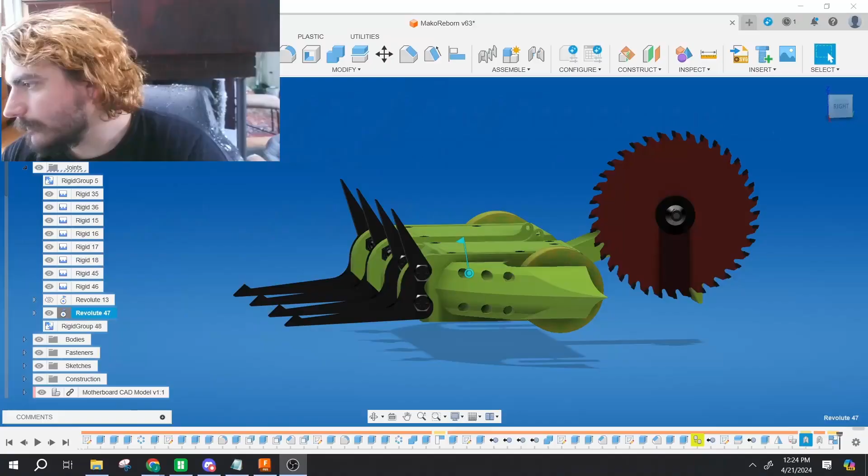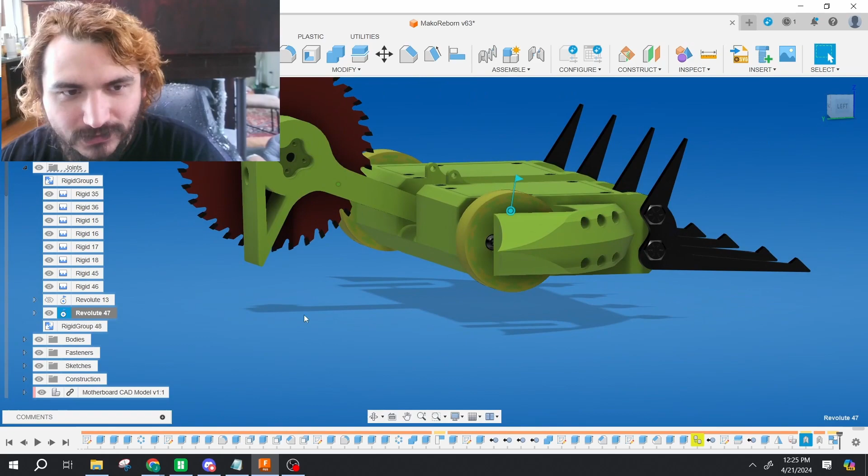Alright, here's the new boy. The first thing you'll notice is that the saw arm rests all the way in the back and swings a full 180. Besides the obvious, where having the saw arm back here as opposed to up here, it's a lot safer. Robot's less top heavy, but also pressing this little thingy into the ground allows the robot to be a lot more stable.

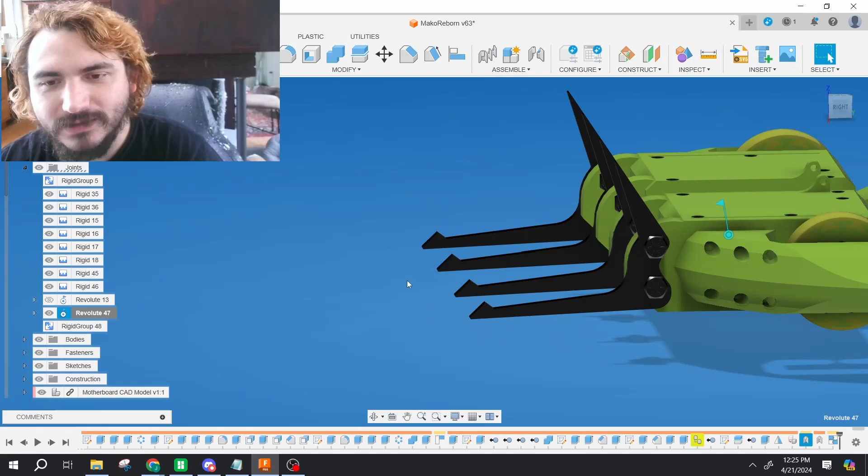I've really enjoyed that aspect of the robot, especially facing horizontal spinners. You know, they're gonna smack this blade up here more times than not. Next feature is I've got 4 forks up here. I've got these little catchers up here, which I've enjoyed using a lot.

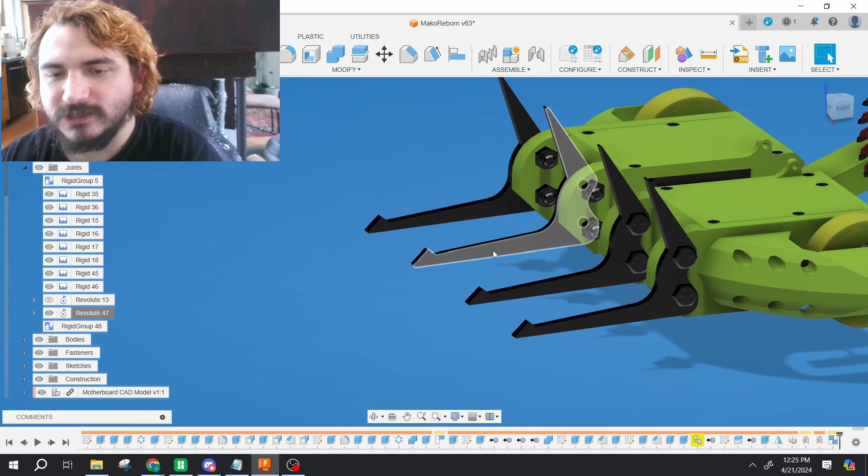And also, these are designed so that the inside forks, I could pop out one of these bolts and they can become hinged. So it allows me to quickly change between, realistically, any of these can be hinged, any of them can be fixed, depending on the matchup. I still don't know when exactly I prefer using fixed versus hinged, but this allows me the flexibility to do that.

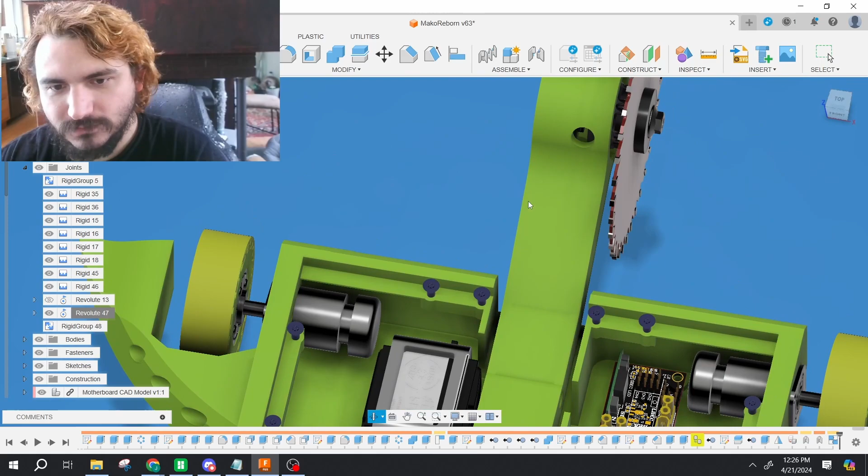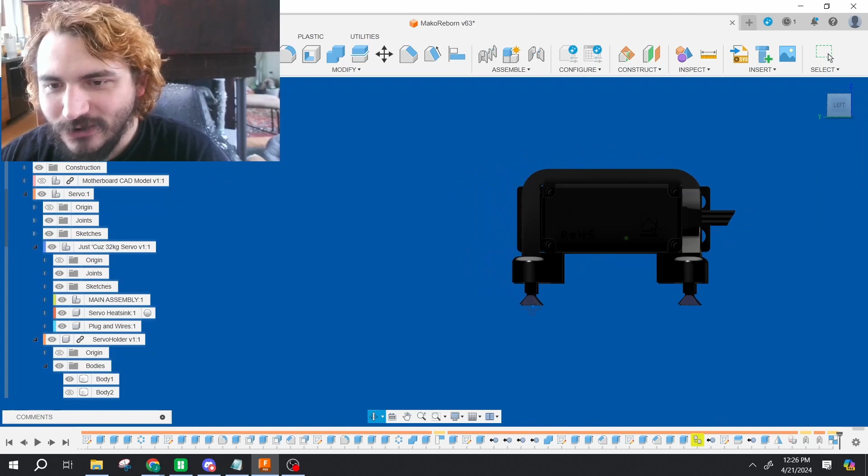Opening this sucker up, see, I've got a big 32 kg servo in here. This is the Just 'Cuz 32 kg model, just slightly modified for the changed geometry. But let's see, we've got a TPU mount, we'll call it, that holds the servo in, raises it up a little bit, and screws in through the bottom.

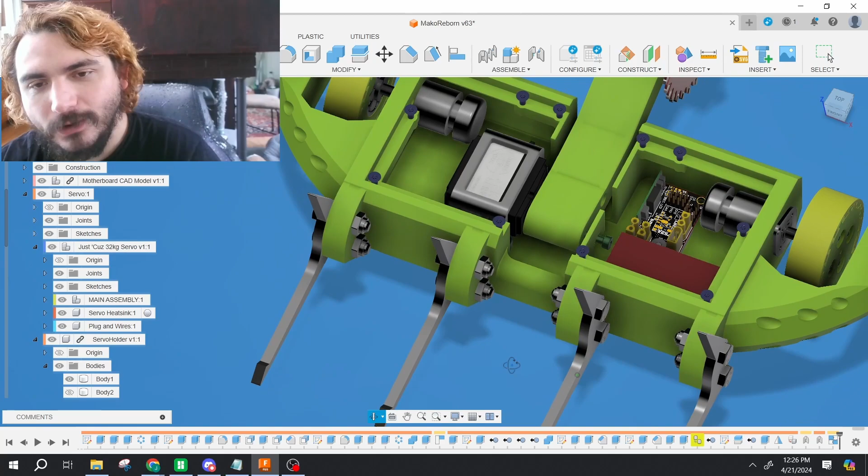This allows me to quickly pop this out if I have to between matches, tighten everything back up, and screw it back in. I used L mounts, L brackets, made of aluminum in January, and the big hits would bend them, and also the screws were just slowly vibrating out into the servo and into the bottom of the robot, which, you know, I could just Loctite them, but then that makes it more of a pain in the butt to pop it out between matches. So this has worked well.

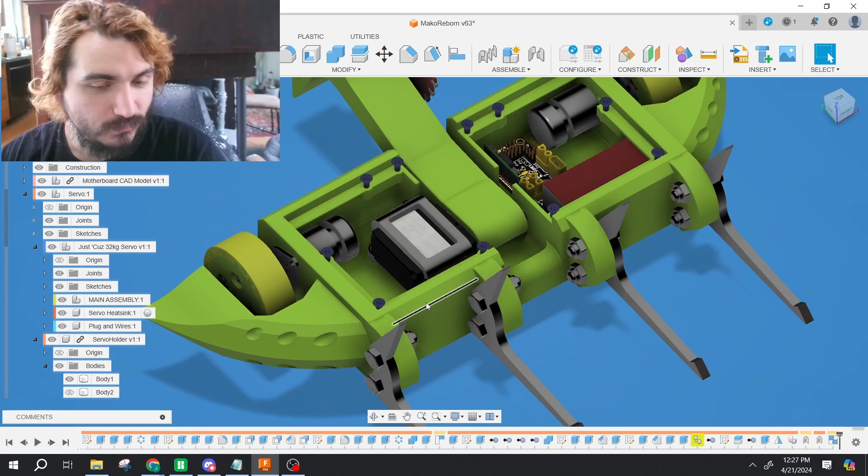Another thing is, because I've got this whole split chassis thing going on, I can feed the servo wires under there, feed the wires from this motor under there, and they are relatively out of the way.

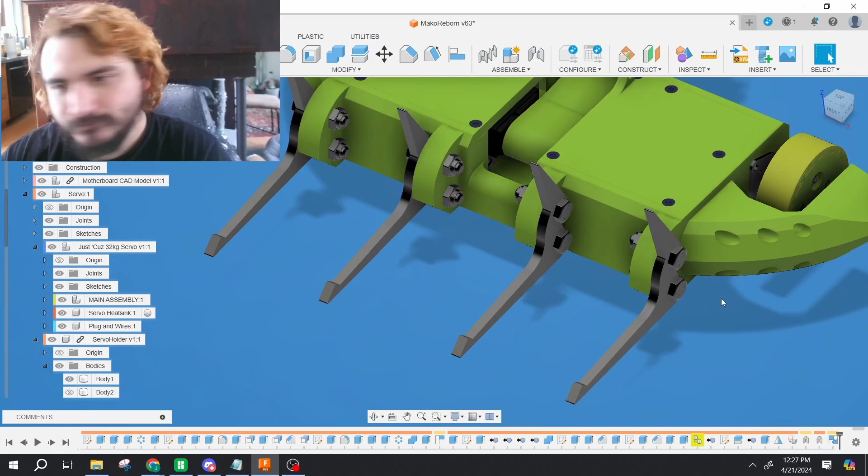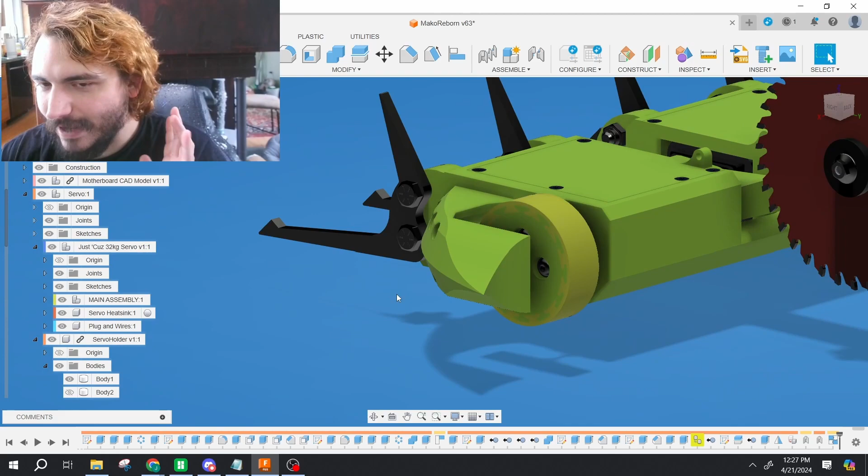Next thing is these wheel guards. I guess conventional wisdom is that these are bad wheel guards because they don't go all the way down and they're going to get caught by vertical spinners. My idea here, and it might be stupid, is that if there is a robot on my side and it's a vertical spinner, I would want them to actually hit this early and bounce me away, and hopefully that gives me a second or two to reset.

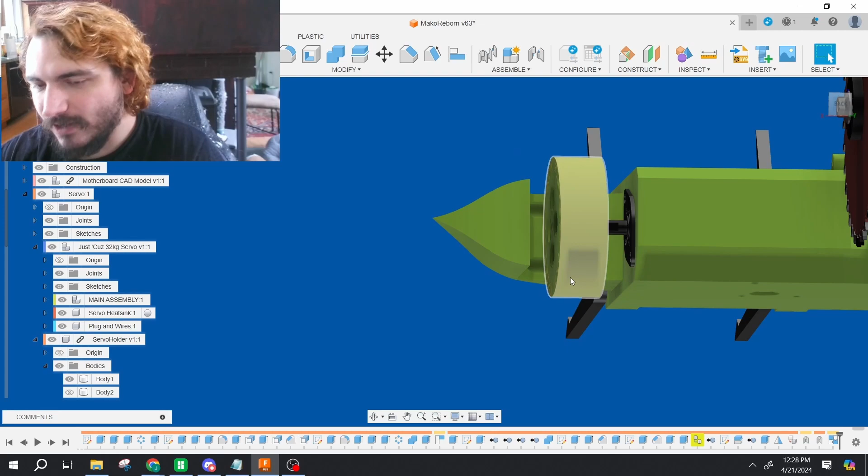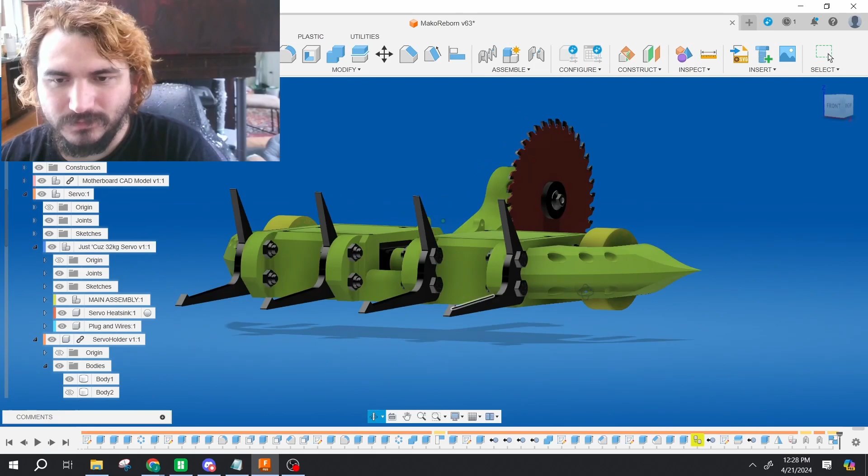Versus if it was a more standard wheel guard, they might get under me, hit my wheel, get to the juicier bits, and keep hitting me. The idea with this is it gets caught early, flexes, bounces, and gives me an opportunity to reset. I don't know how good that has been working, but also it just looks cool. Sometimes you have to go for the aesthetic over the capability or whatever.

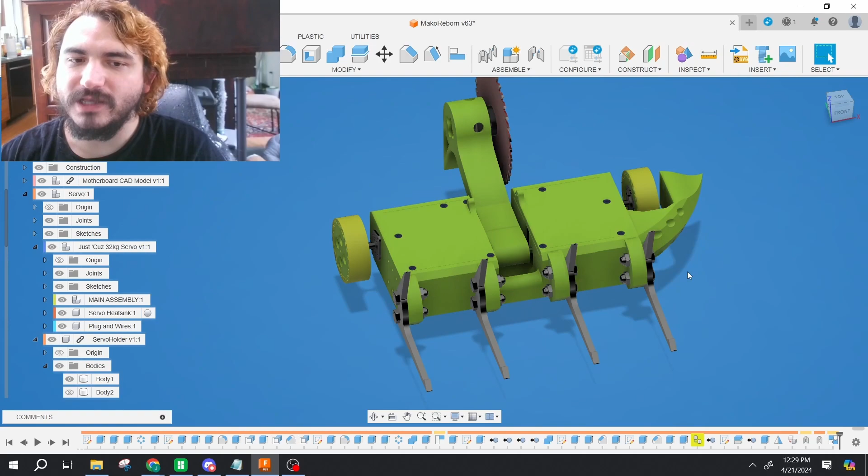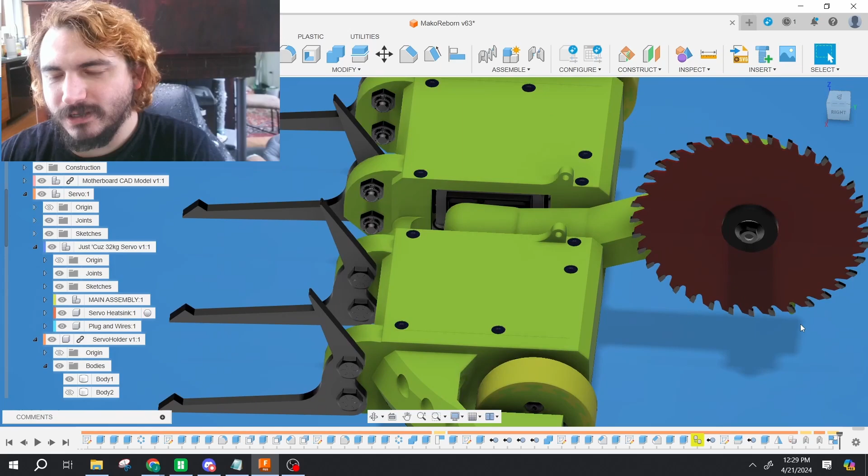Another interesting thing is these are symmetrical, so I can come with 3, 4, 5, whatever, and they can fit on either side. I can also remove these against control bots, which I do in this tournament. Because realistically, I don't need to protect the wheels, and this would prevent me from getting lifted by these, getting caught on the side of the wall, whatever. Yeah, not much else interesting going on. The saw arm now has a little channel to keep the wires safe.

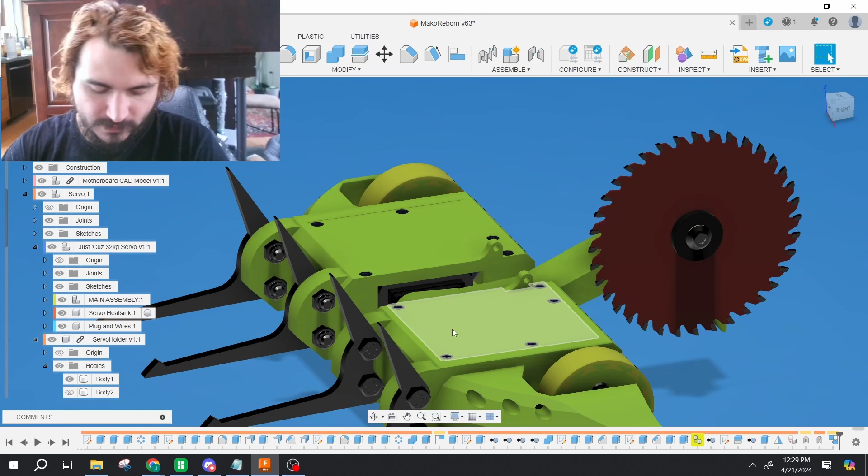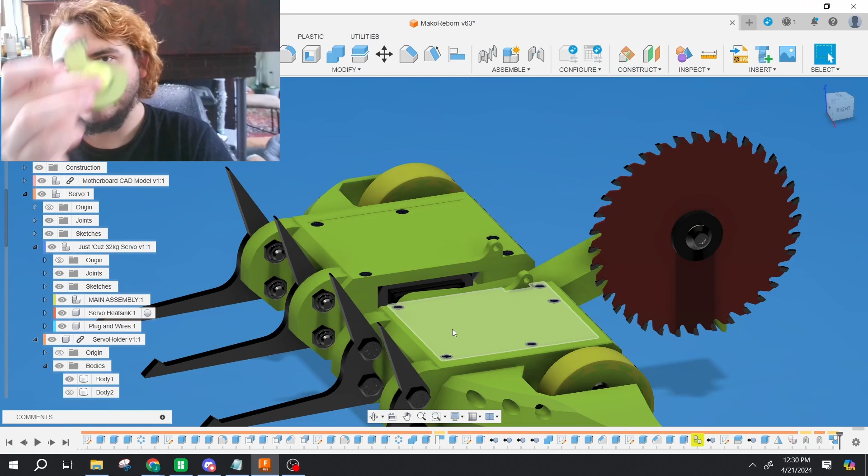Oh, and one thing that I quickly designed between March NHRL and this tournament was a little custom AR500 blade. The idea with this is, instead of cutting, maybe I can get some big hits. I've also got a faster motor, which can keep this spinning at 300 miles per hour, despite being 3 inches compared to the typical saw I use, which is 4.5 inches.

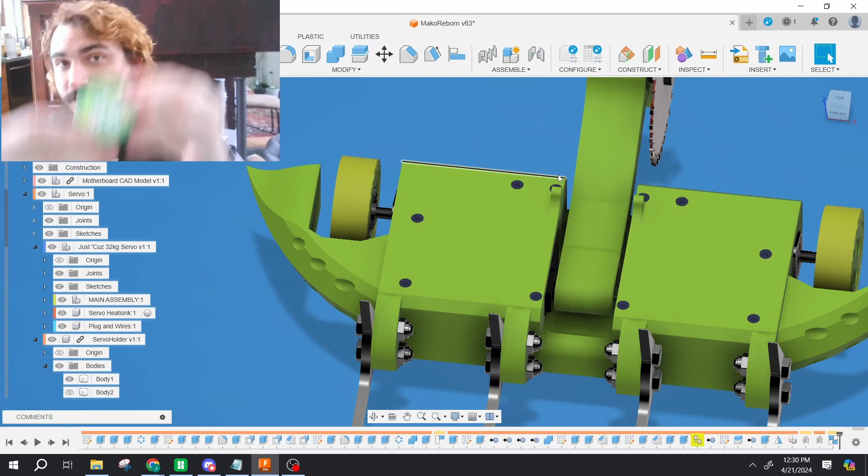Not much else has changed since NHRL to this tournament, but these are the old wheels, and you can see the mount pops out the side, which is less than ideal. New wheels. This goes inside, sits in there, and I guess the idea there is it's protected, and if the wheel gets hit, there's less of a fulcrum going into the motors.

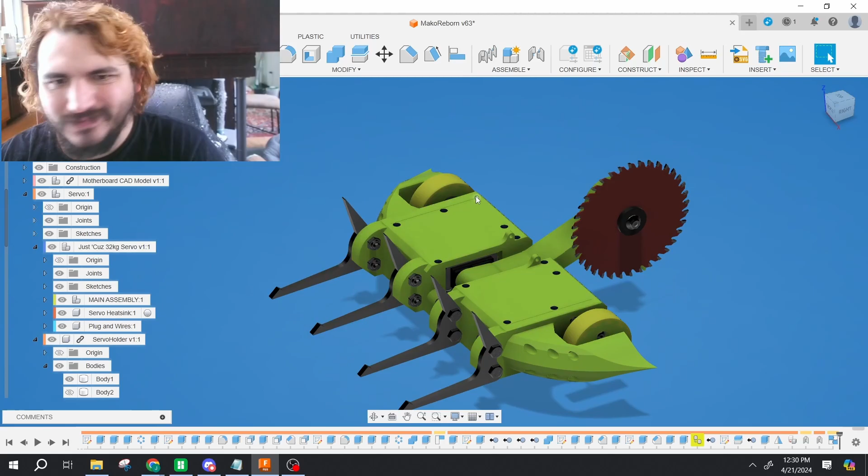I've been rambling. This tournament had 15 robots, double elimination. Did not know who my opponent would be until we got there, really. First opponent is Honeycomb, an SSP kit. I believe the driver's name is Mark. I wouldn't say I was excited for this matchup, but I was kind of glad to get a control bot first. It's SSP, which I'm super familiar with. So at least I knew my robot would not get completely obliterated in the first match. Mark was a very nice guy. I actually helped him with a few things to get his robot in.

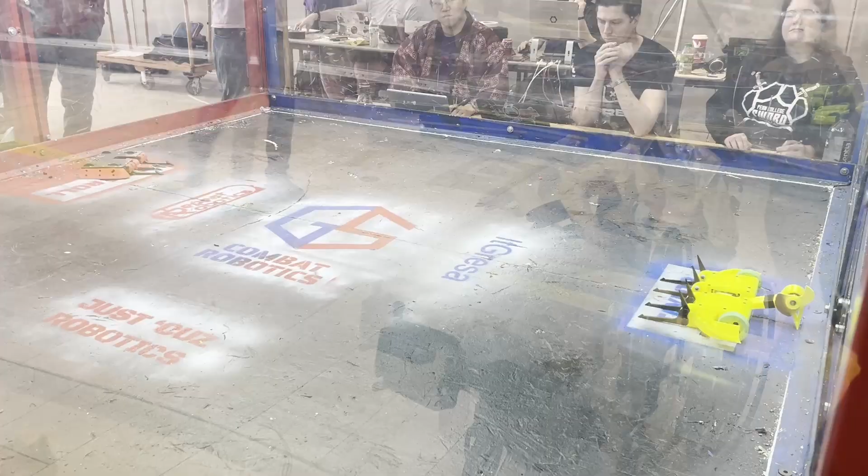Here's the match. 2, 1, fight! So here comes Mako. Here comes that spinner. They bring it down. Now, it looks like those forks are doing their job. Mako can't quite reach the body. Got to get to his side. Let's see if they can get to the sides or the back.

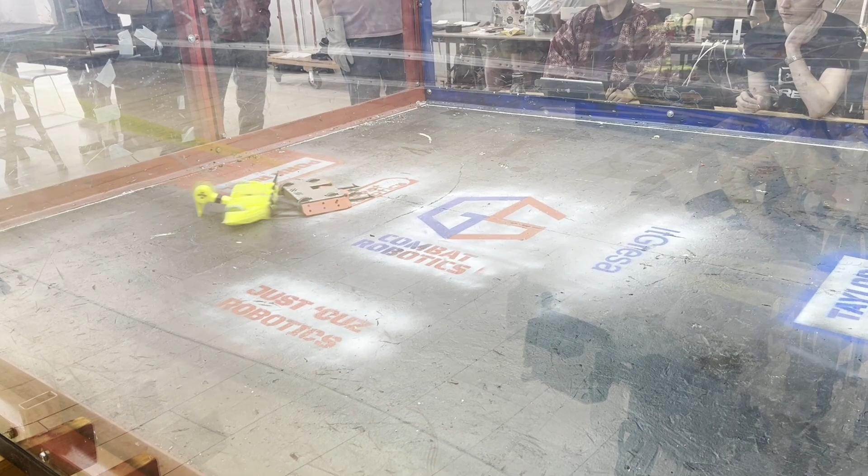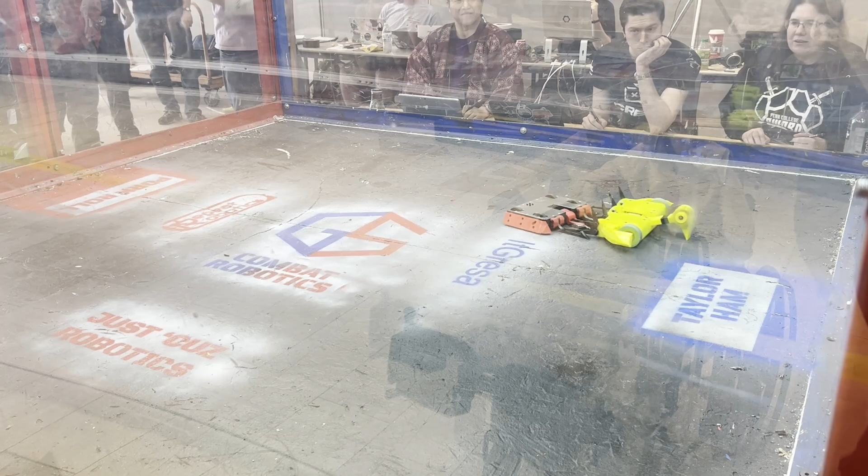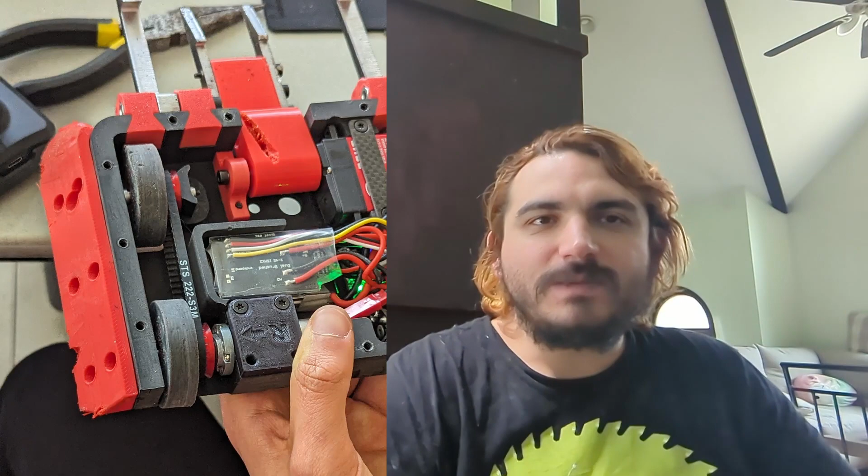So that was a bit of a mixed bag. Got a fairly quick tap out, but unfortunately one of their drive sides was just not working right out the gate. One of those things where it works when you test it, and then you put the robot down, and something's funky. Thankfully, they did not tap out right away. I still got to at least test my robot. However, this weapon did not do too great. Cut right through some TPU, but swinging into their titanium made some cool sparks, but did not elicit a big hit. I was definitely not getting through the titanium. But regardless, still happy to come away with the win.

This next matchup here is up against Ryan with Apex Predator. It's a gorgeous 4-wheel drive beater bar robot. I notice he's got a G10 or carbon fiber top plate. Not sure exactly what it is, but I know it should be weaker than titanium. So I figure let's give this weapon one more shot.

Let's get this fight started in 3, 2, 1, fight! Good box rush from Mako. Yes! That's that hammer saw down on the back of Apex Predator. You see that hammer getting stuck in the wheel gap of Apex Predator. A couple of good big hits, but now Apex Predator is starting to return fire, getting good traction against those forks of Mako. Apex Predator now starting to juggle Mako around.

Another good hit. Mako's forks should be underneath there, but Apex Predator's bar is so low it's able to reach those forks. Mako looking for another big hammer saw strike, but I think their right wheel is locked up. So Apex Predator able to get beneath Mako now. Mako wants to drop that hammer saw again. A good hit from Apex Predator there. Apex Predator looking for another good hit. Mako looking for another strike. Swinging that arm, but nothing doing just yet. 90 seconds left in this fight.

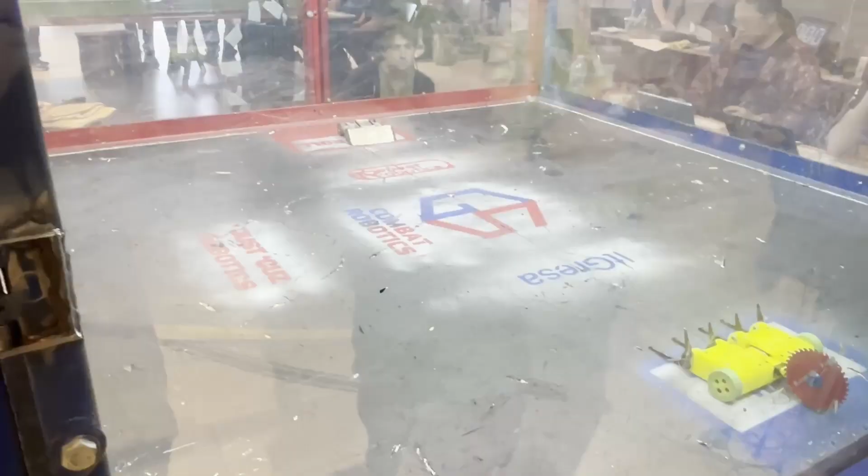I've got to be judicious with my saw, because if I break it without doing any damage, then it's going to be pretty hard for me to win. But either way, let's watch it. 2, 1, fight! Here we go. Nice. Both bots looking for an angle. Mako had Underbite teed up very briefly, but sorry, that's Underglow, not Underbite. Nice push. Totally different bot.

Underglow was able to get out of that pin, but oh, here comes that nasty saw. Sparks everywhere. You hear that saw. Don't drop it on the wedge next time. And Underglow launches himself against the saw. Mako's got to be really careful. Those saws bend very easily. Once they do, they're nowhere near as effective. Don't jinx me here. I'm not jinxing you, Julian.

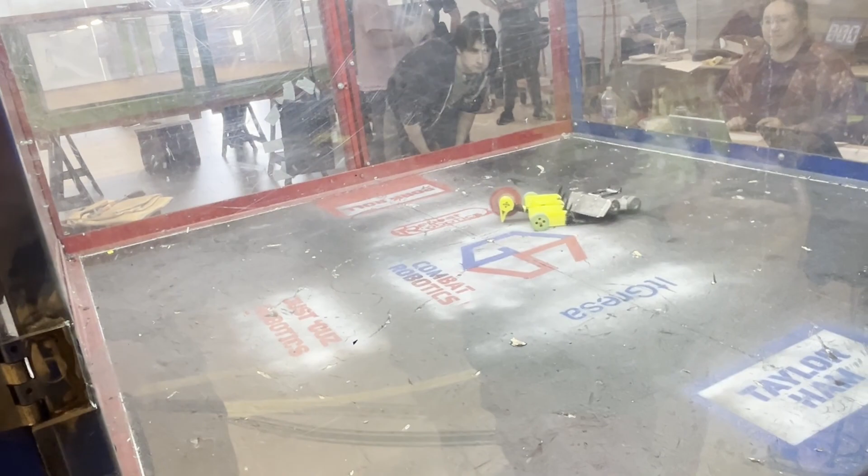All right, Mako getting Underglow into the corner. Nice! Do it again. And another hit. And I can see already there's a big slice taken out. More! Some more big hits. These hammer saws are terrible. Wheel. You see that saw getting a little bit wonky, but it should have a couple more hits in it.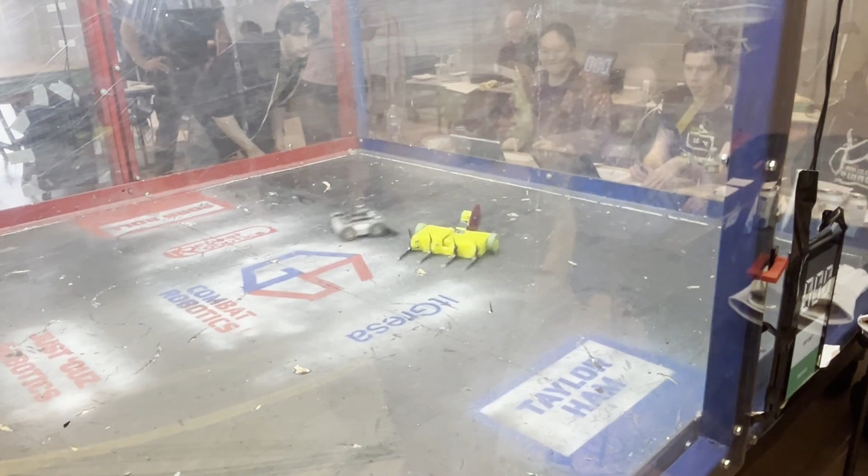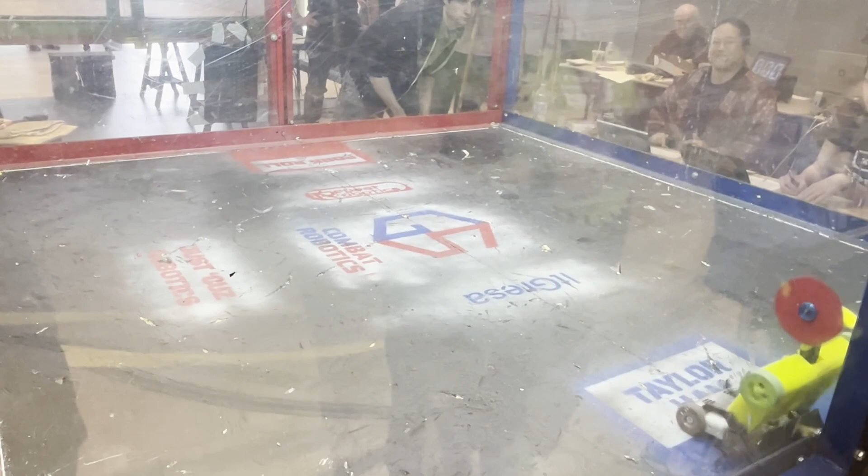Here comes Underglow. If Underglow can survive a little bit more, maybe it can turn the fight. 80 seconds. Don't go crazy. Underglow with that big torquey lifter. Mako looking for another hit. It's already got a few slices in. Some big slices in. That's a pin and up from above.

And you see a little cloud of TPU raining. You're up. 3, 2, 1. And that's the pin being released. 50 seconds. That saw still spinning. Nice! And a big hit on the top.

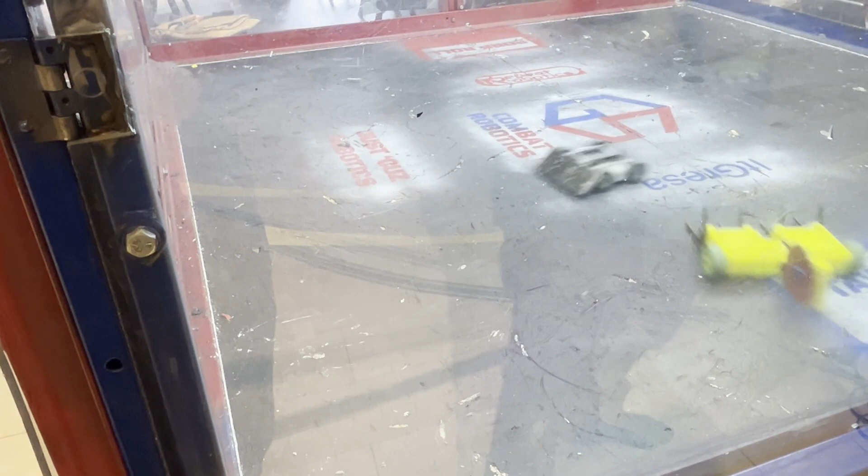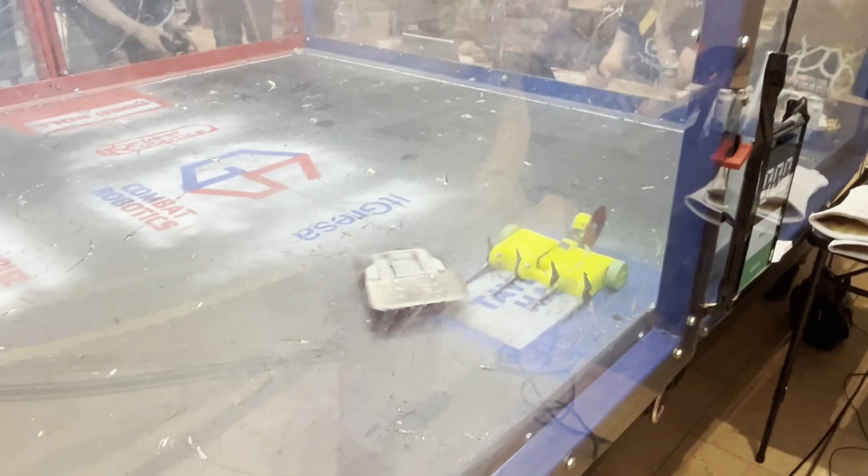Unable to get a second hit in, but a lot of these really big sparky hits happening. Now, oh, that might be a pin for Underglow. It is. Back and forth fight here. Underglow with a top and bottom, and here comes Mako. Stop it, stop it, stop it. Don't kill your weapon, don't kill your weapon. And now it's sawing the arena.

10, 9, 8. And about 10 seconds remaining in this fight. Mako going for another hit, and it does. And gets into that wedge. 5 seconds left in this fight. 3, 2, 1. And that's Mako going for a hit. That's the match. Woo!

That was a tremendous fight. Very difficult match. Me and Rob were sitting there waiting for the judges, both fingers crossed. I kind of thought I barely won. I'm sure he thought he barely won. It was so close, but by the grace of the judges, I won, I assume, by a point. May have even been split. I do not remember. But yeah, great fight.

Real close on control, real close on aggression, but maybe I get a little damage points, even though I didn't cause any significant damage. I did cause some damage. But yeah, that was a great fight. Seeing the sparks fly was a lot of fun. If anything, next time I may have been more aggressive, maybe spinning the saw up earlier, using it more often. But if the saw broke at any time, if at the checks at the end my saw was down, he would have definitely won. But we came away with the W, so I'm happy.

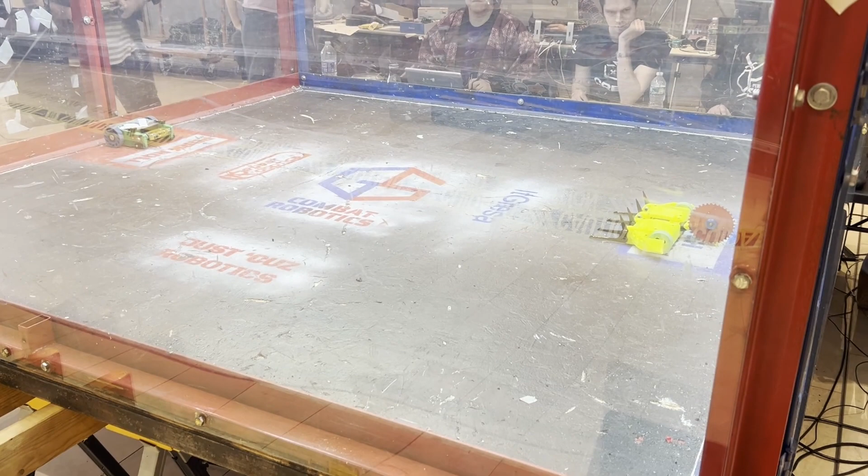3, 2, 1, fight! Yes Chef weapon turns around, tries to get around Mako. Mako with a good hit. 5, 4, 3, 2. Good. Mako trying to get that saw. Nice. Trying to get that saw into that spinning bar. Mako's going to want to get around to the back. Keep doing that, man. Yes Chef has a very chaotic way of fighting.

That's what they're going to try to do as best they can, is just be everywhere in the cage at once. Careful, careful. There's that saw. You hear it spinning up. Are you going to drop it? We'll see. 3, 2, 1. Release. Now they got to release that pin. He's attempting. There they go. They've released the pin. Looking for an angle. Nice. Get him.

What it's doing is it's striking the force of Mako and flying away from the impact of that hit. There's a good drive. Oh, and there's a good hit. Do it again. That's exactly the kind of hit that Mako wants. Attacking the side. They want to hit the side of that bot. That's exactly what they're doing. They don't want any part of that bar as far as that claw's concerned. So that lock is perfect for them. 80 seconds. We're halfway over. You're doing good. Just keep it up.

Here comes Yes Chef back again. Trying to find some angle on it. Oh, get it. Oh, that was almost it. Mako just couldn't get Yes Chef to really give him a good hit. Stay square, you're doing great. Mako, when they pin Yes Chef, Mako wants Yes Chef pinned by the side. So yeah, they bring the hammer down now.

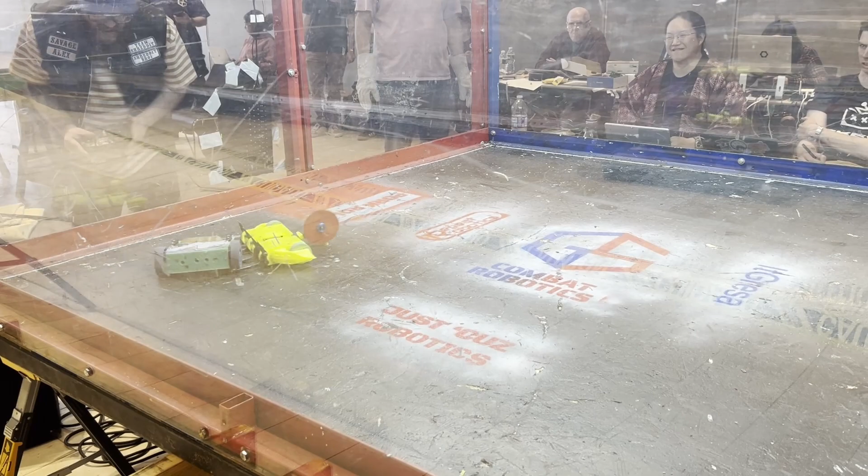I see a little chunk of armor missing from the top of Yes Chef. Actually, I think that's the bottom of Yes Chef that Mako got. So Mako able to make a little slice in there. Hear that saw spinning up. Are they going to drop that saw again? Yes, they are. Dropping the saw to that spinning bar. That's the kind of hit that Mako wants. That's exactly what they want coming through. Drop it slow. Yes! That saw was like a half inch into Yes Chef's body.

Let him live. Another hit. Is that it? That's all? Oh, wait. Oh, no. Wait, are you done? I'm not done. You can do whatever you want, but it's not working. Is that a tap out? 6, 5. Unclear whether Yes Chef is tapping out or not, but it looks like that bot is done. That is a knockout.

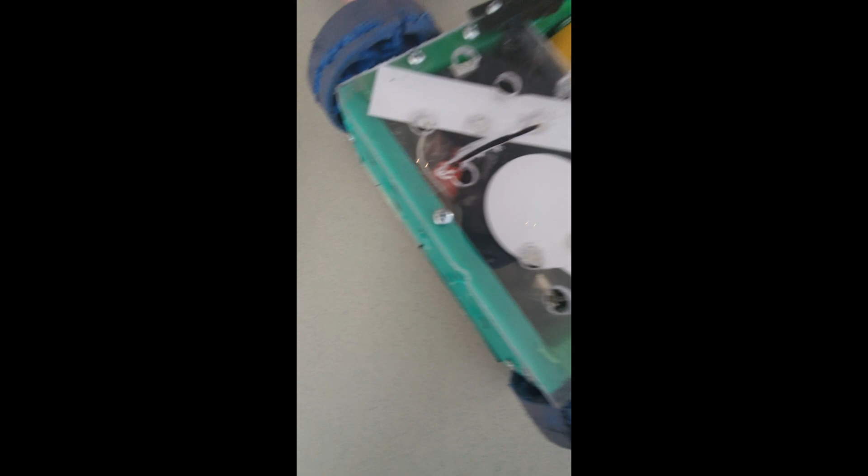Mako knocks out Yes Chef. At the top, wheels. That's impressive too. The two. Heck yeah, man. And then you got one good one on the bottom. Yeah, that was like the first one, I think. Really?

I think that's literally my favorite match now. I know I probably just said that about Underglow. If not, I thought it. But tremendous match, and then one that might just be a little bit better. The little horn forks did exactly what they were supposed to do. Kept him corralled. He even popped up into them once or twice.

Throughout the match, I kind of became more confident with bringing the saw down early on, just kind of biding my time, waiting for the perfect shot. I landed a jab here or there, but eventually I got him kind of stuck, pinned in the corner, and slowly brought the saw down for what was almost a kill shot. Might have been a kill shot.

It seemed like his robot shut off and then sprung back to life for like a split second, and then died again. Not really clear, but I think they called it a knockout in the commentary, but it went to the judges. He survived the bell right at the end, but I won that. And Alex actually sent me this pic a few days ago of one of his motors exploding, I guess, from the shock of dealing with my forks.

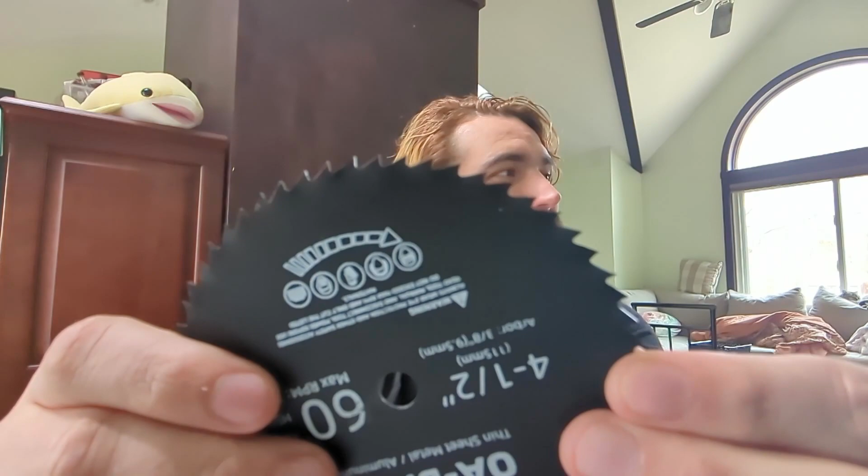It'll be hard to pick it up on the camera, but what's interesting about this is each one of these teeth is offset from the other. They alternate, going from side to side. I can't get it. Let's see. You can kind of see there.

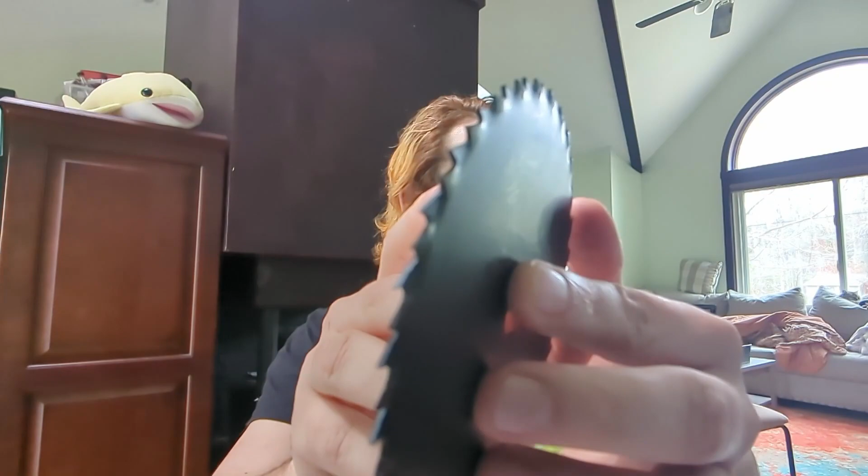Talking to a woodworking friend, or rather a friend who does woodworking, Ben, who runs Bean Supreme and codename Pinto at NHRL, he also thought it would be interesting to try this. I might be able to get some ripping action. But overall, I'm just nervous, but very excited for, like I said earlier, a chance for revenge.

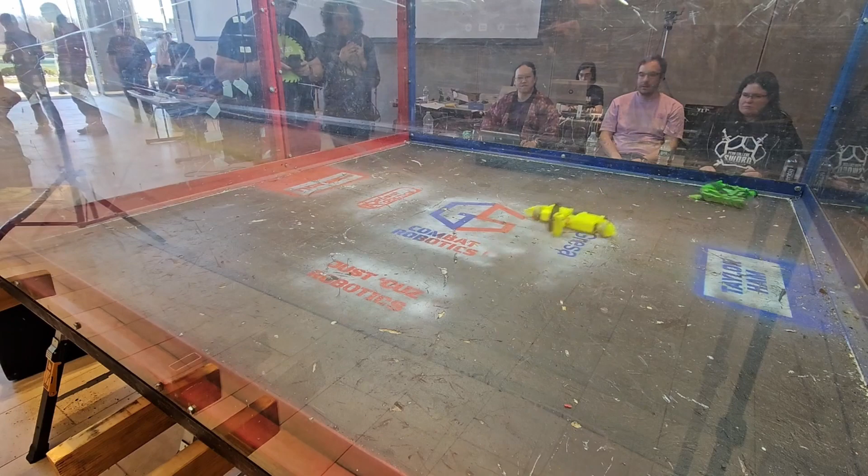So, here we go. 2, 1, fight! Neither bot going for the box rush. They're approaching cautiously. Good hit from Apex Predator onto those forks of Mako. Mako will take all that abuse from their forks. They want to pin Apex Predator and bring that saw down like that.

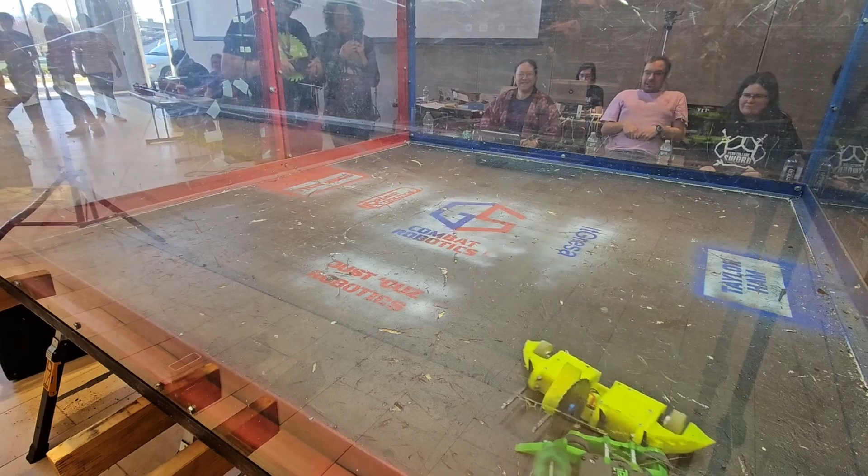So there's one saw, there's two saws, and Ryan is saying that they're entangled. We need to unhook, they're unentangled now. And Mako briefly upside down, big hit. Mako upside down again. He can self-right very quickly with that actuating arm. And the head, and a little bit of Mako just came off.

And I don't know if that saw is going to be able to continue to spin. Let's see if he can get that saw moving again. In the meantime, that is a lot of hits. And you get that saw spinning. And the arm is definitely working, and the saw spinning, and now it drops, and it is taking a couple of hits. I think they're stuck. Release the pin. They can't release the pin.

Let's pause. Are we stuck? Okay, we're going to unstick these two bots. So Apex Predator's top plate showing that it's up to the test so far. Yes, it's still going. So we don't want to open this case. Oh well, looks like they've done their job for us. Yeah. Okay, blue square, are you ready? Red square, are you ready?

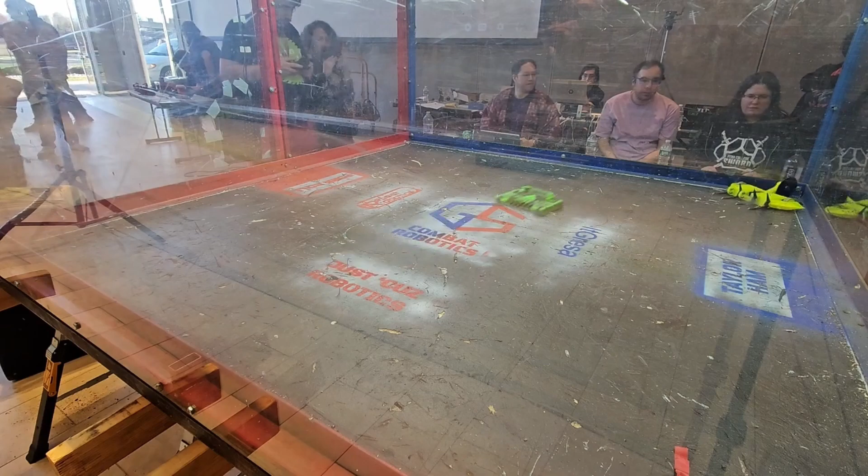This fight restarts in 3, 2, 1, fight! Apex Predator spinning around Mako, trying to get itself off the ledge. Oh! Huge hit, and that is the belt off of Apex Predator and half of the saw. I'm sorry, a quarter of the saw is off of Mako. Off the ledge. Oh! Yes!

That was a massive hit, and both bots took a lot of damage off that hit. He's still trying to spin that saw. It's not going to be very effective with only 3/4 of a saw to work with. So both of these bots a little bit compromised, but Apex Predator trying to push against Mako. 30 seconds left in this fight.

Are they stuck again? They're stuck again. And we're pausing again. This time we don't have to wait quite so long for the saw to finish. And we're going to... There we go.

Oh, come on, Alex. There we go, Alex. Don't make me get Alex to take the crowbar.

All right, red square. I'm sorry, blue square. Are you ready? Blue square is ready. Red square, are you ready? This fight will resume once again in 3, 2, 1, fight. All right, so no weapon for Apex Predator, and 3/4 of a saw for Mako.

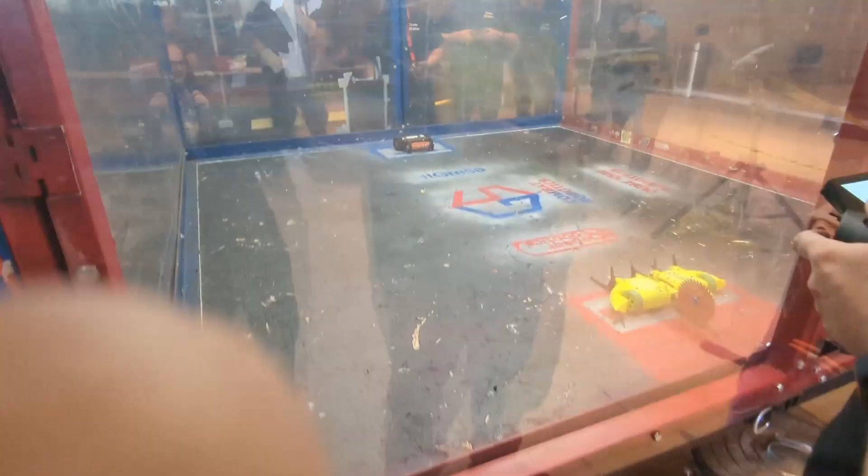The next matchup here is up against Jay with Marvin, another veteran two-wheel drive beater bar. Interestingly enough, this weapon actually spins faster, but I was hearing from some people that he is a more conservative driver. So a little bit of give and take here. But it's going to be the same strategy as against Yes Chef, and let's see how it goes. All the marbles. Whoever loses will finish third.

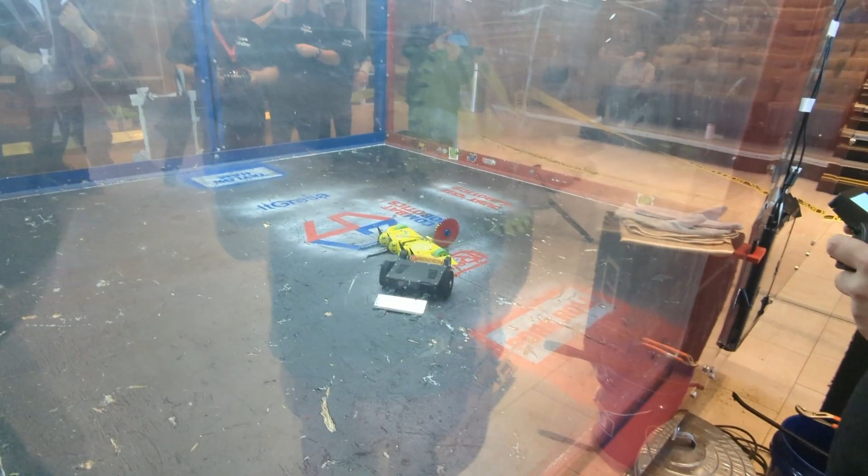Okay, we are ready to start. Here we go. 3, 2, 1, fight! Stay calm, stay calm. Wait. That's a tap? Yeah. All right, so Mako will advance by a tap out. Okay, sorry. And it will be Mako versus Portable Apocalypse. Now the Tapioca really wants attention right now.

So that was a good win. There was some confusion on my end. I couldn't tell exactly what was going on, but during that initial charge, their top armor fell off. They knew they were stuck in a scary pin, so they tapped out. So I didn't cut through some important stuff. But yeah, that's a great win there. And with that, I have

won the losers bracket, and I'm now in the grand finals up against my now rival Ryan, only with his assumedly better robot, which is very similar. It's a 4-wheel drive robot, only instead of being a beater bar, it's an undercutter. He doesn't have carbon fiber top and bottom plates. He's got some titanium, I think, or aluminum. Either way, it's harder metal for me to cut through. But we're in the grand finals.

Something I haven't talked about much is I've been having problems with my motors locking up left and right. So coming into this match, I've got 2 copies of the robot. And on each of them, one motor locks up after spinning a certain amount of time. It was intermittent, happening on both robots. I had another spare, but I didn't have time to swap it in. So I was kind of sitting there, 2 robots ready to go. And I just kind of got to decide when it's go time, which one I'm going to use. I decided on one of them, and here's the match.

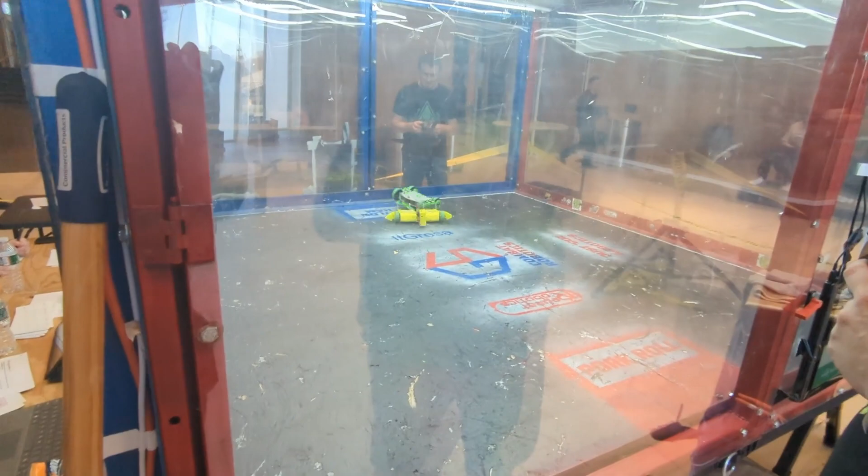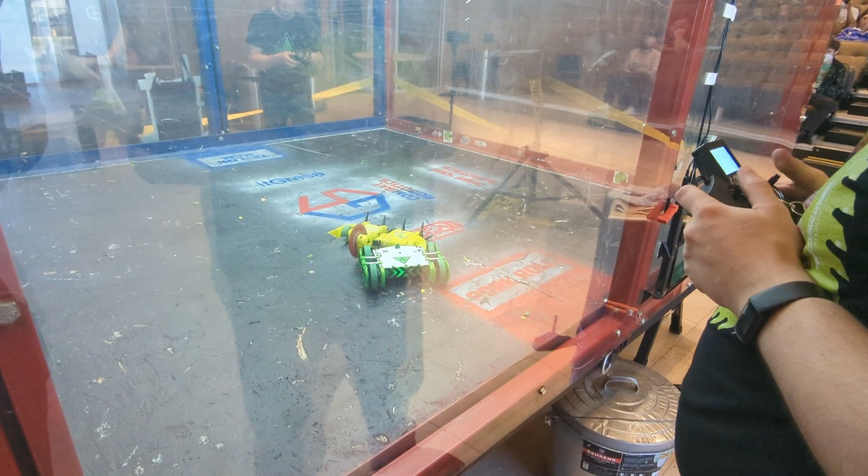I'm ready. Missouri. Missouri. Or Texas. Judges are ready. Audience, are you ready for this middleweight grand final? Started in 3, 2, 1, fight! Nice. Good box rush from Mako. Your wheel's shredded, but it's still working. It's still working, but it has no traction. If you get close to him, you're going to need to drop it. Drop him. Is he dead? Drop it, just kill him. You don't know if he's dead, kill him.

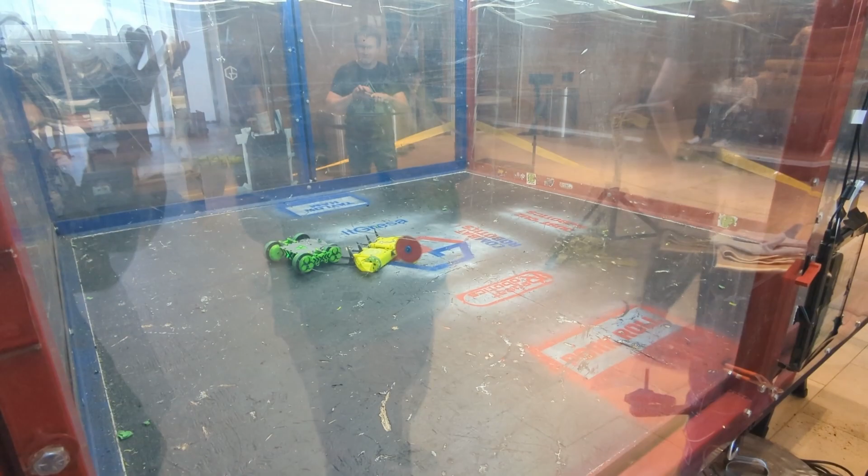That was the weapon. Keep. Spin it and hit him. Hit him. You gotta hit a wheel. You gotta position to hit a wheel. You're not gonna hit that. You're not gonna break that. You gotta turn. Yes!

So I pulled it off. I won. There's a lot that happened in a short amount of time. So I'm actually going to play another camera angle. Things to watch out for. I had a somewhat successful box rush. I think his ESC actually power cycled. But he came back to life in a big way and started shredding both of my tires. You can see the green stuff pinging all over the arena.

At one point, both of my tires were locked up. See me swinging my motor into the ground while it's running, because that's the only thing that I can do. He comes around to damage a tire more, and it actually frees it up. But at that point, I'm like, oh crap. I'm spinning the weapon up as fast as I can, halfway in the air, and just come down with what was a kill shot. At that moment, I didn't know if he's going to spring back to life.

I didn't know if I could even still move, but I knew that I was lined up for more shots, so I kept taking more and more until he tapped out.

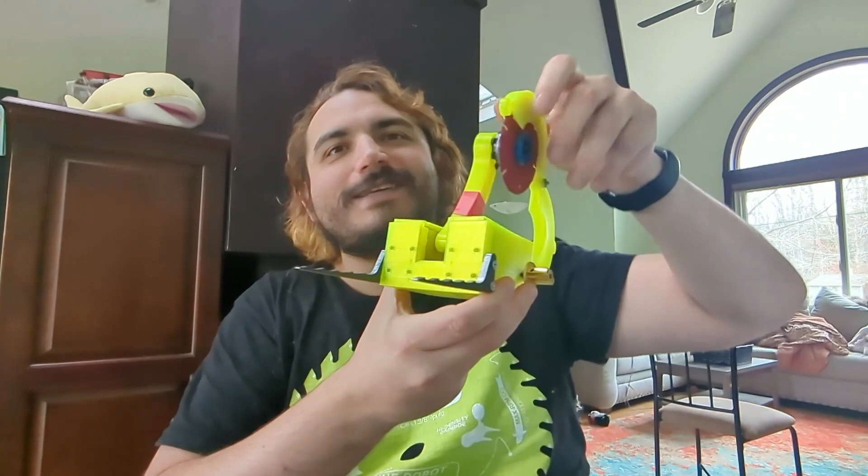What's next? Less than a week from now, the 27th, me and my sibling Dima are gonna be competing at Maker Battle in Connecticut with our antweights. Here's my mini version of Mako. It's had a couple of revisions. His wheels aren't on, obviously. But maybe I'll cut some top plates off. I don't know why he's kind of cockeyed right now. But you get the idea.

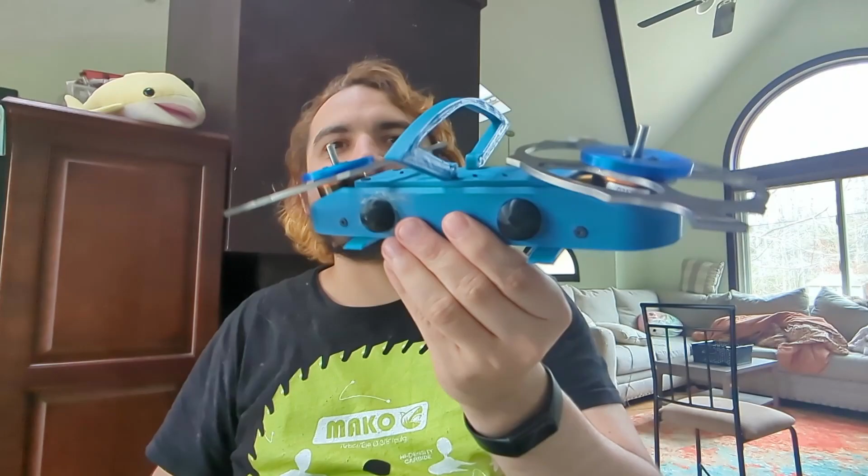And they're going to be running Turbocopter, I think we're calling them now. A little antweight torque walker. The weapons might come flying off, but I think it'll be exciting before that happens. After that, we're registered for the May 4th GSCRL. We're definitely bringing at least Mako and Turbo Friend, our beetles. If we have a good time with the ants, we'll bring them too. They're currently registered, but I don't know. Dealing with 4 bots between the two of us in one day might be too much.

We'll see. But besides that, I would love to bring Mako to the next NHRL, but the one that just passed, we were stuck on the wait list, which is frustrating, especially because we were so close to making it in. But we've already got to do 2 tournaments with Mako. I think Turbo Friend has done 3. So our chances of getting into the next one with those robots is quite low. So maybe we'll be building something else.

Some of you know that I've got a vertical spinner sitting in a box. So maybe I will redesign that slightly and bring that sucker. We've also been toying with the idea of running a 2-pound Mako with a 2-pound Turbo Friend as a multibot, a 50-50 multibot. But NHRL is potentially changing those rules, so we'll see. But as you know, I love this stuff. We'll keep competing in whatever form it takes.